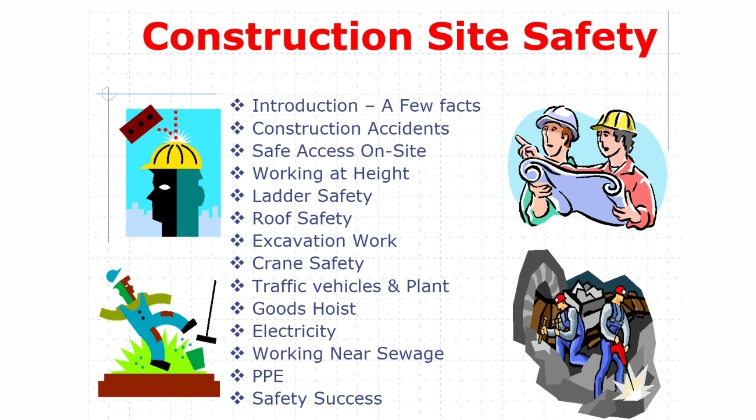A few facts. The first week on each new site is the most dangerous. Accidents are more frequent at the end of the day. Small building jobs are the most risky. Safety helmets, high visibility jackets, and safety boots do prevent injury and death. Lightweight shoes such as trainers or runners are not suitable on site.

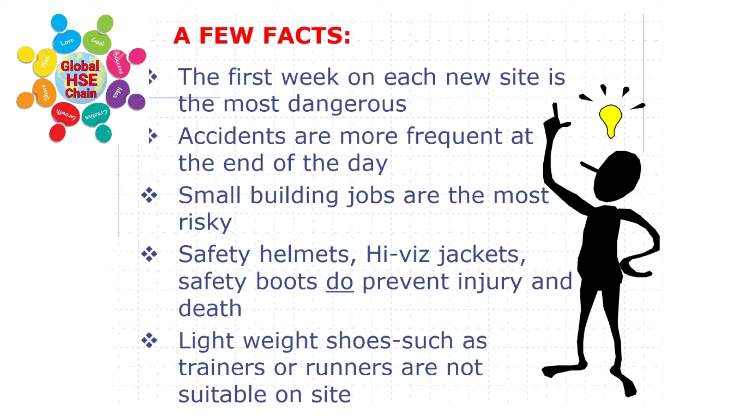Construction accidents. Breakdown of fatalities according to type of accident in the construction industry: 56% falls from height, 21% trapped by something collapsing or overturning, 10% struck by a moving vehicle, 5% contact with electricity or electrical discharge, 4% struck by a flying or falling object during machine lifting of materials, 3% contact with moving machinery or material being machined, 1% exposure to a hot or harmful substance.

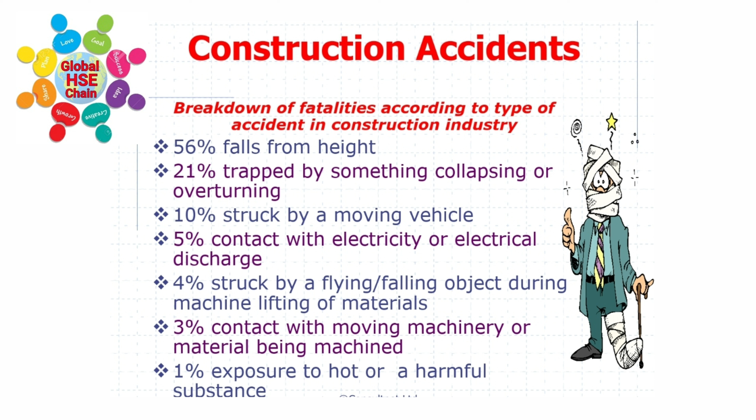Safe access on site. Everyone can get to their place of work safely. Edges from which people could fall are provided with double guard rails or other suitable edge protection. Holes are protected with clearly marked and fixed covers to prevent falls. Site is tidy, with good lighting, fenced off from the public.

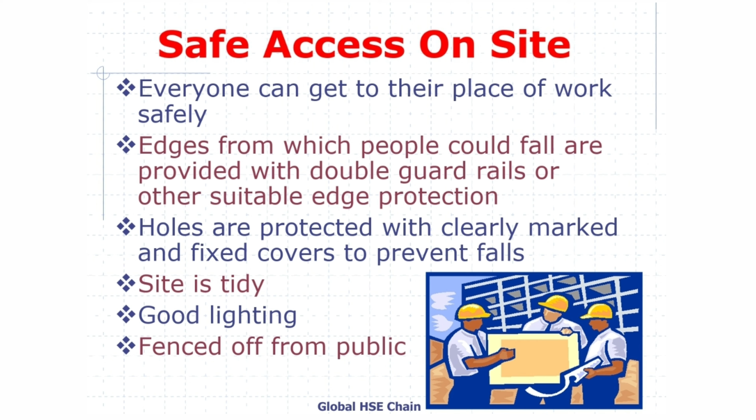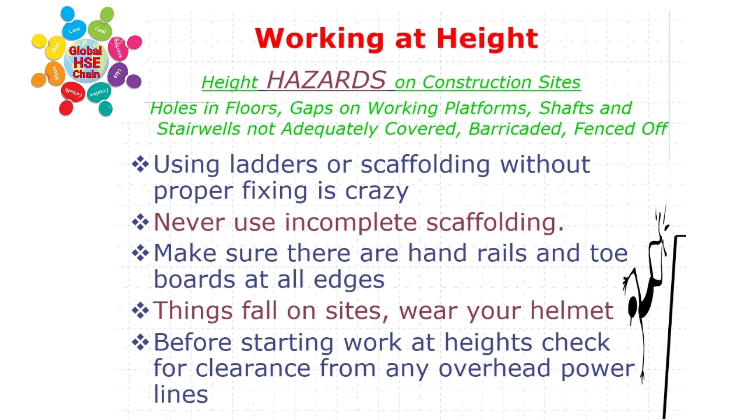Working at height. Height hazards on construction sites: holes in floors, gaps on working platforms, shafts, and stairwells not adequately covered, barricaded, or fenced off. Using ladders or scaffolding without proper fixing is crazy. Never use incomplete scaffolding. Make sure there are handrails and toe boards at all edges. Things fall on sites. Wear your helmet. Before starting work at heights, check for clearance from any overhead power lines.

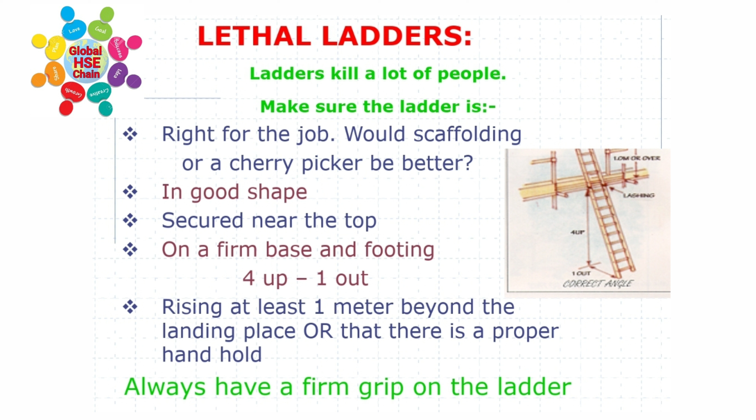Lethal ladders. Ladders kill a lot of people. Make sure the ladder is right for the job. Would scaffolding or a cherry picker be better? In good shape, secured near the top, on a firm base and footing, 4 up, 1 out. Rising at least 1 meter beyond the landing place or that there is a proper handhold. Always have a firm grip on the ladder and keep a good balance. Here are some pictures of unsafe ladders.

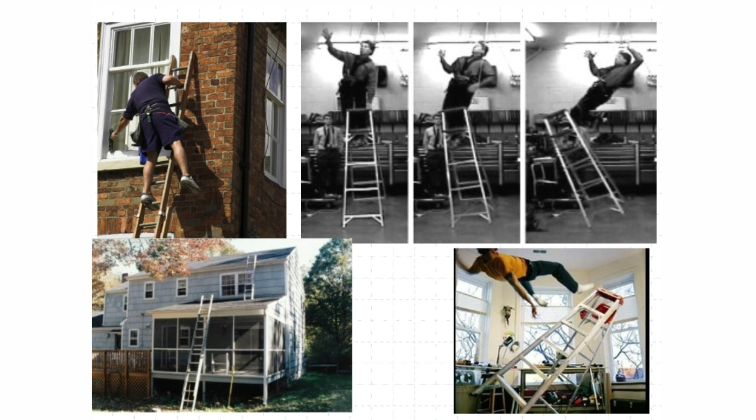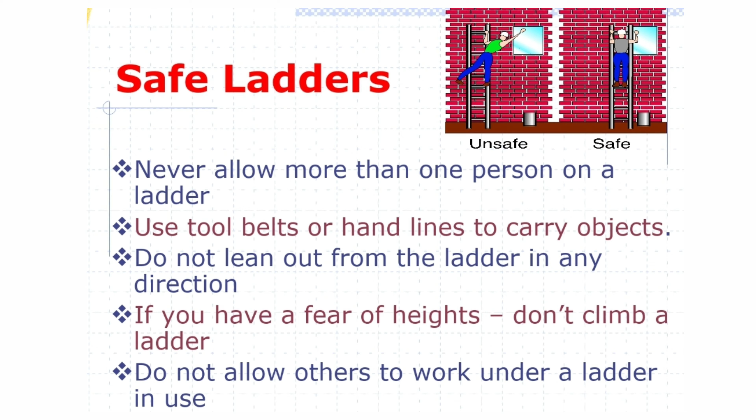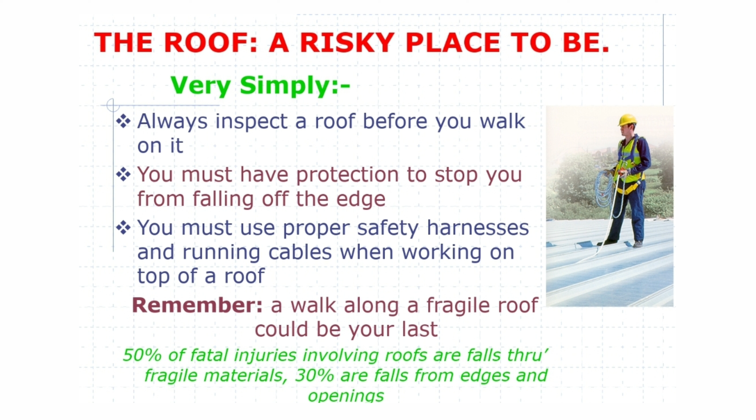The roof, a risky place to be. Very simply, always inspect a roof before you walk on it. You must have protection to stop you from falling off the edge. You must use proper safety harnesses and running cables when working on top of a roof. Remember, a walk along a fragile roof could be your last. 50% of fatal injuries involving roofs are falls through fragile materials. 30% are falls from edges and openings.

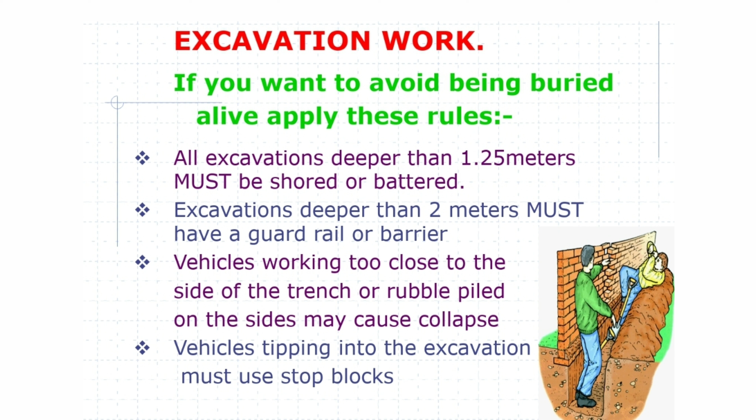Excavation work. If you want to avoid being buried alive, apply these rules. Make sure the excavation is inspected daily. Make sure you know where any underground pipes and cables are before you hit them. Remember, there is no safe ground that will not collapse. Trench sides can collapse without warning.

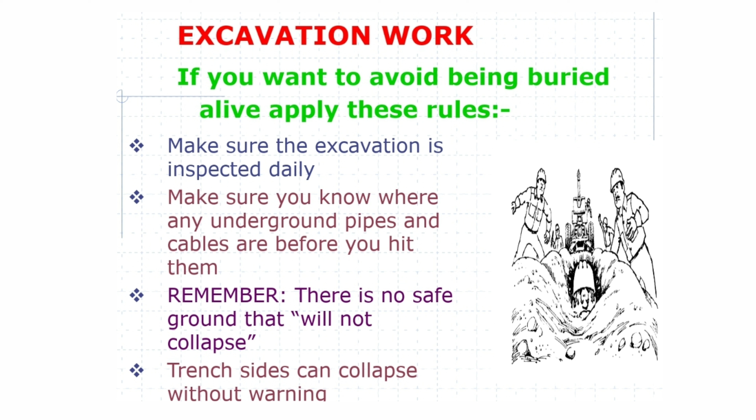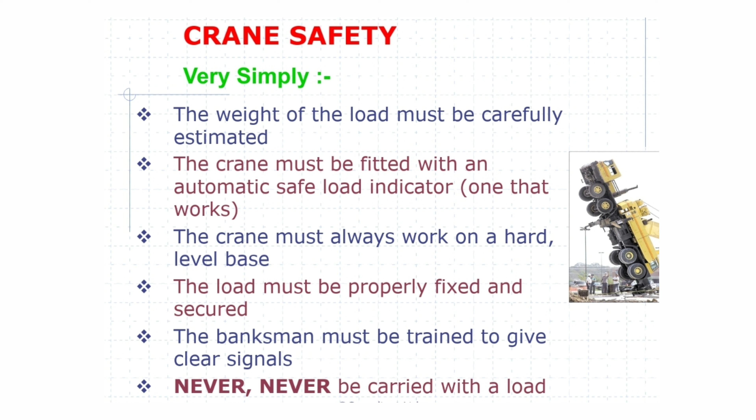Crane safety. Very simply, the weight of the load must be carefully estimated. The crane must be fitted with an automatic safe load indicator that works. The crane must always work on a hard level base. The load must be properly fixed and secured. The banksman must be trained to give clear signals. Never be carried with a load.

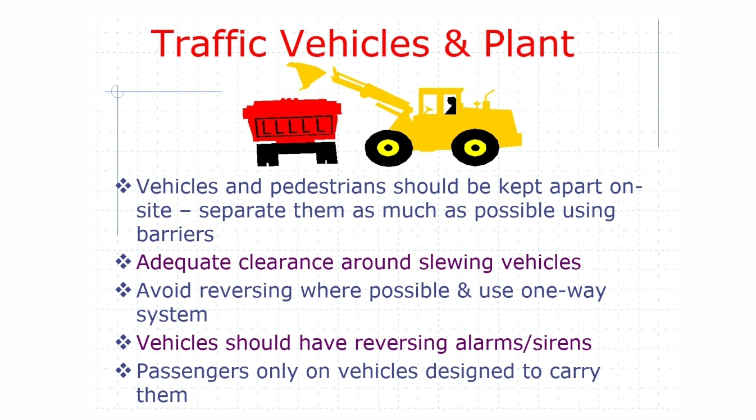Traffic, vehicles and plant. Vehicles and pedestrians should be kept apart on site. Separate them as much as possible using barriers. Adequate clearance around slewing vehicles. Avoid reversing where possible and use a one-way system. Vehicles should have reversing alarms, sirens. Passengers only on vehicles designed to carry them.

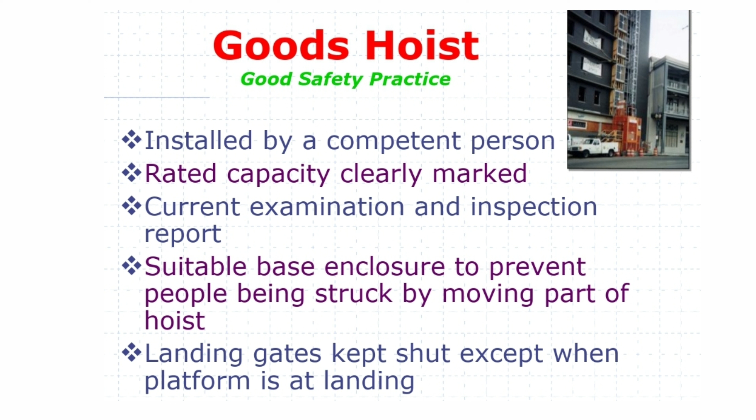Goods hoist, good safety practice. Installed by a competent person. Rated capacity clearly marked. Current examination and inspection report. Suitable base enclosure to prevent people being struck by moving parts of the hoist. Landing gates kept shut except when the platform is at the landing.

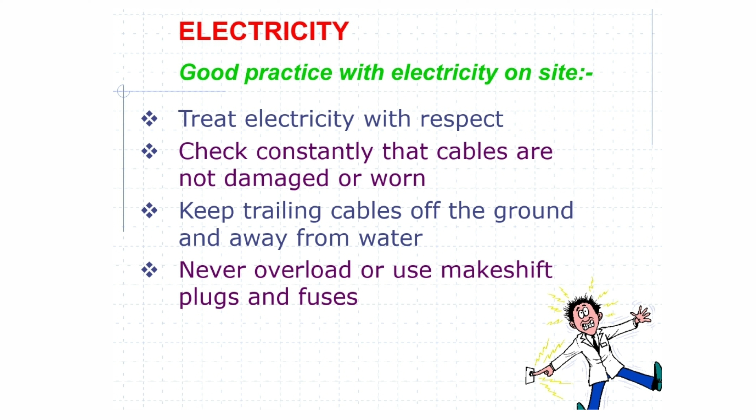Electricity. Good practice with electricity on site. Treat electricity with respect. Check constantly that cables are not damaged or worn. Keep trailing cables off the ground and away from water. Never overload or use makeshift plugs and fuses.

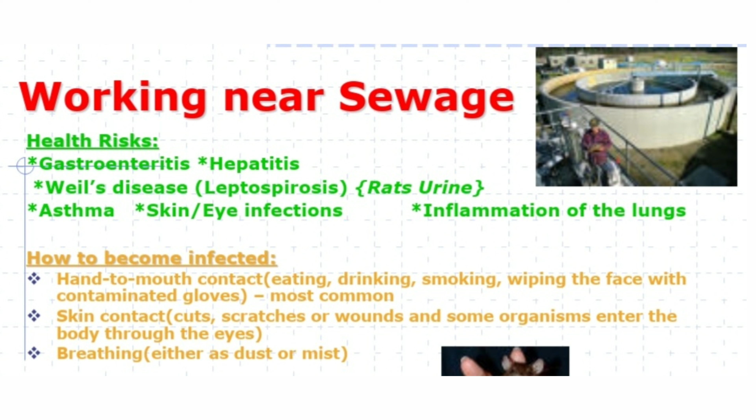Working near sewage. Health risks: gastroenteritis, hepatitis, Weil's disease, leptospirosis from rat's urine, asthma, skin and eye infections, inflammation of the lungs. How do you become infected? Hand to mouth, meaning eating, drinking, smoking, wiping the face with contaminated gloves, is most common. Skin contact through cuts, scratches, or wounds, and some organisms enter the body through the eyes. Breathing, either dust or mist.

How to protect yourself? Understand the risks. Understand how you may be infected. Wear protective clothing. Avoid sewage if possible. Apply good personal hygiene. Cleanse all wounds and cover. Change out of contaminated clothing. Clean equipment and boots, etc. on site. If in doubt, see your doctor.

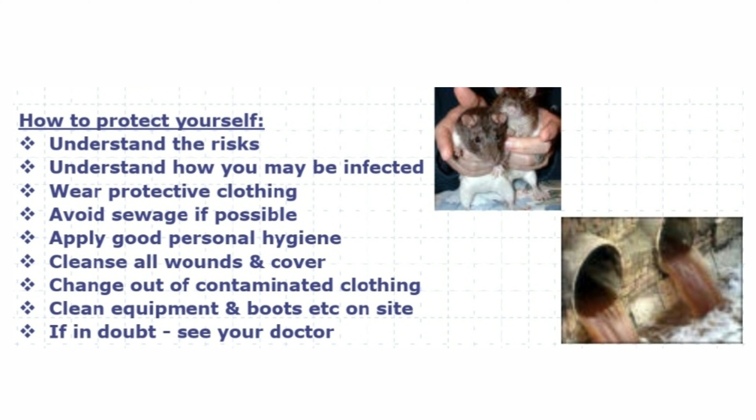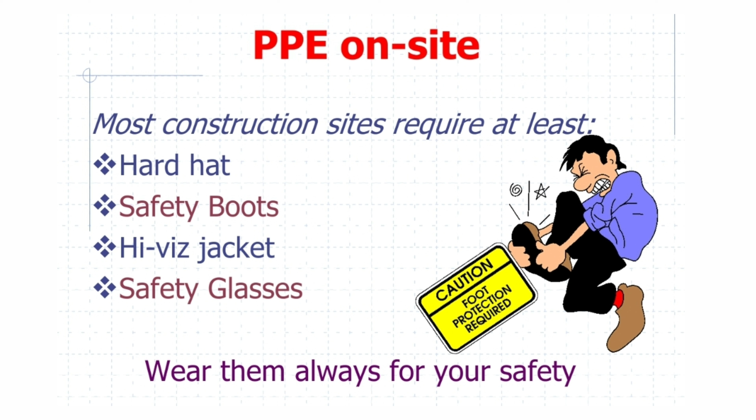PPE on site. Most construction sites require at least a hard hat, safety boots, high visibility jacket, and safety glasses. Wear them always for your safety.

Basic safety philosophy for success. A new safety culture. All accidents are preventable. No job is worth getting hurt for. Every job will be done safely. Incidents can be managed. Safety is everyone's responsibility. Continuous improvement. Safety as a way of life, 24 hours a day.

All individuals have the responsibility and accountability to identify, eliminate, or manage risks associated with their workplace. Legal obligations will be the minimum requirements for our health and safety standards. Individuals will be trained and equipped to have the skills and facilities to ensure an accident-free workplace. What is your approach to safety?

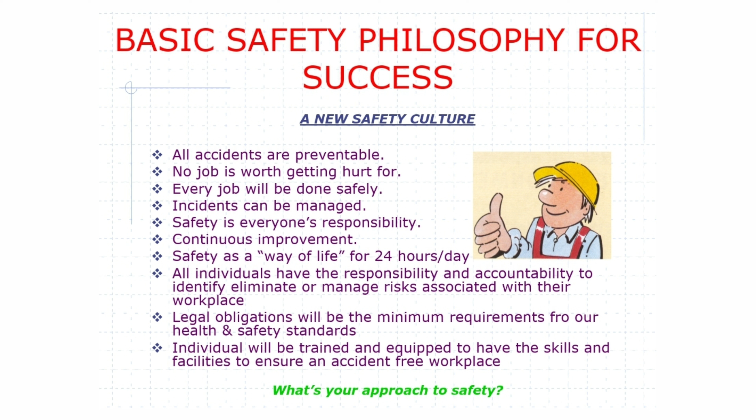Construction site safety. No job is so important that it cannot be done safely. Under no circumstances are persons working on this site to put themselves in danger. Best be safe today. Thank you.